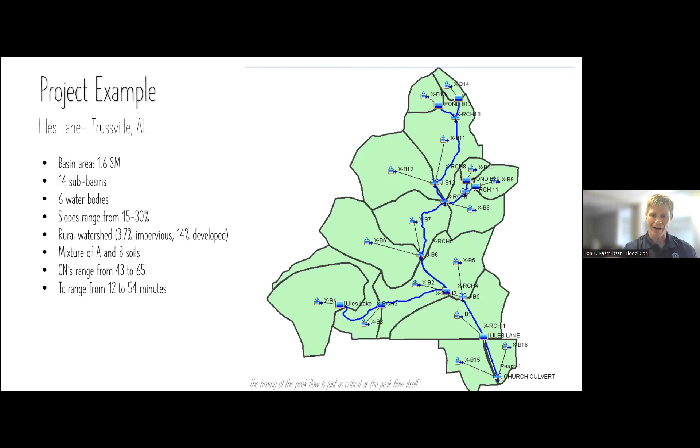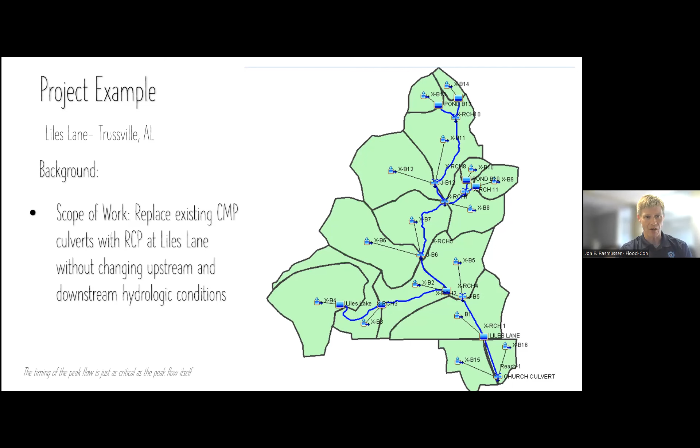And so I like to pick this watershed overall. And so we replaced the culvert pipe with RCP, I think 5 60-inch RCPs to match the hydraulics of the old CMP culvert pipes. And so what we're going to do is look at one of these sub-basins that's about 80 acres in size, and we're going to split it up into 8.08 acres. So basically, I'm trying to meet the 10% on the first one, and then watch what happens as that XB5 grows. And highlighted right there, you'll see sub-basin XB5.

And here's the LiDAR map. I just isolated 10-foot contours. And so you can tell the slope on the watershed appears to be fairly consistent. Aerial photo, you'll see a little bit of open space. It's predominantly pasture. Then you have some woods. Existing data is 81.4 acres. I took a curve number of 62.1 and then adjusted it to meet the slope conditions.

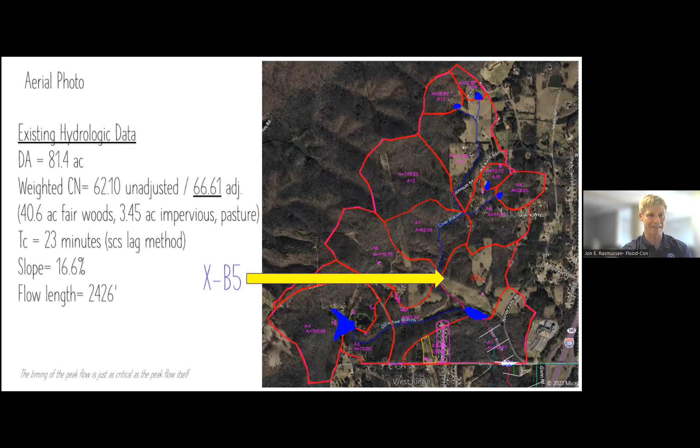And I don't know if y'all do that normally or not. I think it's something you do sometimes. Sometimes you may not want to, but in this case, I wanted to mimic what I thought was existing conditions. So I jumped it up, got up to a 66.61. And so there's a combination of woods, impervious area, and pastures. Time of concentration is 23 minutes. I use the lag time based on the slope and the flow length.

So on new commercial, what I do is implement an 8.08 acre area. The pre-developed hydrology for that 8.08 acres in this spot right here in the green is all wood. So I threw a 60 on there and of course adjusted it to the slopes. So it came out to be that 64.67. Time of concentration is 10 minutes. And so the new commercial hydrology, I just set a curve number 90, 8.08 acres and a TC of 5 minutes. So when you look at a high density commercial, that's about what you're going to expect.

And then the rest of it is offsite. So all of this is all undetained. It's all existing conditions. And this is Dillashaw Pond right here, and that's where it's all draining to. And so the offsite is the large basin 81.4 minus the 8.08. So that's where we're at. The curve number jumps just a little bit because we're taking away some woods and we've got a very small amount of imperviousness here, but we're basically jumping up the curve number and the time of concentration in very small increments as we start cutting that offsite basin down and making our developed part of the basin larger.

So the pond data. So what I did is I put a pond in for the new commercial in HMS and routed it for the 1 through 100. The volume of the pond was 55,000 cubic feet to route all the storms pre-post. Had a reach in there with all this information I plugged in and ran the model. And what I'm looking at is there's XA, there's the offsite right here, and basically I'm bringing it all to a common point where it goes into the pond.

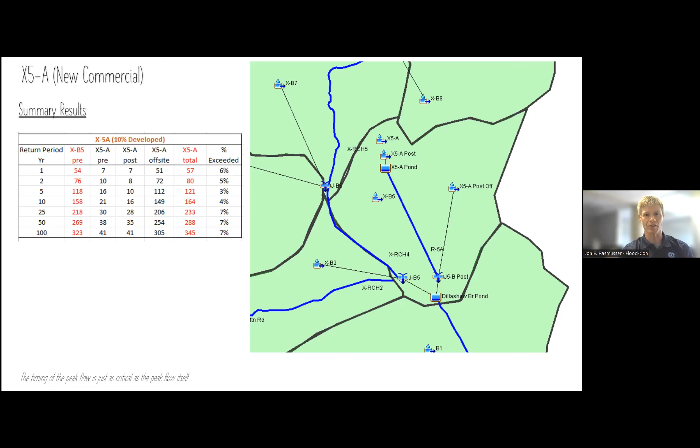So the summary results. Now I'm going to start running through these slides because I got 1 through 100 year events. I want to show you what happens as we progressively increase the watershed with new development. And so here's the first shot. This is 8.0 acres developed of an 81 acre subbasin. And what you'll see is I've got the year returns 1 through 100.

The pre right here is basically the overall basin pre, the 81 acres. And then the X5A pre represents the 8.08 acres that we're disturbing for the new development, right? Okay, so that's the pre-developed flow rates that we would be matching at the property line. And then we have the post, which is what's coming out of the conventional system to match pre-post. And I did a pretty good job. Thank you. Anyway, so now we have offsite, and offsite is going from 51 to 305.

And then the total right here, look at this, just take for instance the 100-year, it actually increased 7% compared to the pre. So it's not like we're blowing the world out, right? It's about 20 CFS, 22 CFS, but that's with 10% developed of the overall basin. Okay, so we've changed the hydrology of the overall basin, but we've just met the pre-post at the property line.

So in that respect, we're trying to do one thing, but are we really checking for downstream conditions change? And notice, my pre-developed outlet right here is 41 CFS. All right, and then my post, I matched it at 41. Okay, but 41, and we have 8.08 acres. So multiply that by 10, that's 410 CFS. That's way more than 323, right?

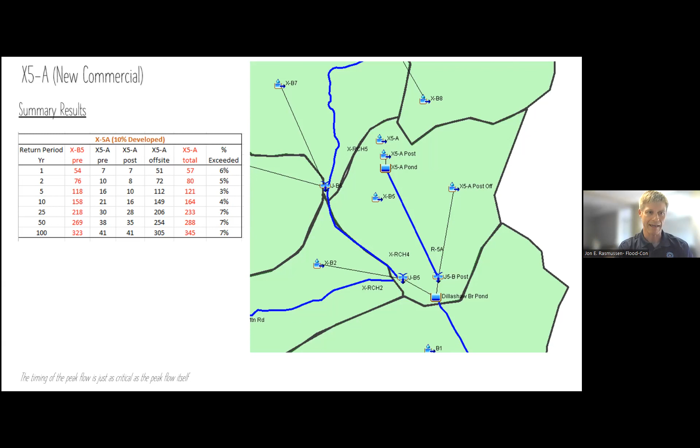So when we do our pre-developed pre-post, and I know we're not talking about homogeneous watersheds a lot when we're in a developed basin, but we need to think about, are our pre-developed flows linear with respect to the overall larger subbasin? And you may find that it isn't. And so then we go to a new installment of 8.08 acres, and I'm putting it over here on the other corner of the subbasin.

And what's happening here, all this information is going to be predominantly the same. What I am doing here is decreasing my offsite and changing my curve numbers and time of concentrations. And there's the HMS model. Same thing with the conventional system, got the reach. And so now here's my summary results by adding collectively the two 16 acres together. Now my peak flows, here they are at the total. This is total at the outlet. We've increased 100-year by 9%.

So we're adding on a little bit more post-developed flows as we increase the imperviousness of the area. So we add another one in here. Here's the third one that we add in. And there again, pretty much the same hydrologic data that I've used. Offsite gets a little bit smaller, curve numbers get a little bit higher, time of concentrations get a little lower, which means more flow. And same, this is a repeat, but the reach is different. Every reach that I've done, I've actually calculated it on LiDAR topo and got all this information. So every reach is common to the subbasin that I'm developing.

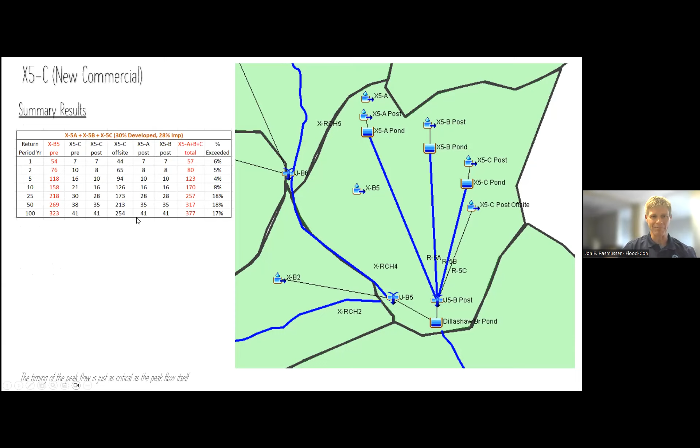So here we go. Now we're going up to 17% exceedance of the pre by adding 28% imperviousness. Okay. But we're still matching pre-post at the property line. And as we move forward and we add another one, so this one's in the middle there, basically using the same pre-developed hydrology, which is kind of conservative because that's open space, but I'm using the woods. So I'm using conservative estimates on my pre-developed hydrology to get my pre-developed flows. My hydrology data stays the same for the post, and then my offsite drops a little bit more. And so does my time of concentration, and my weighted curve number goes up.

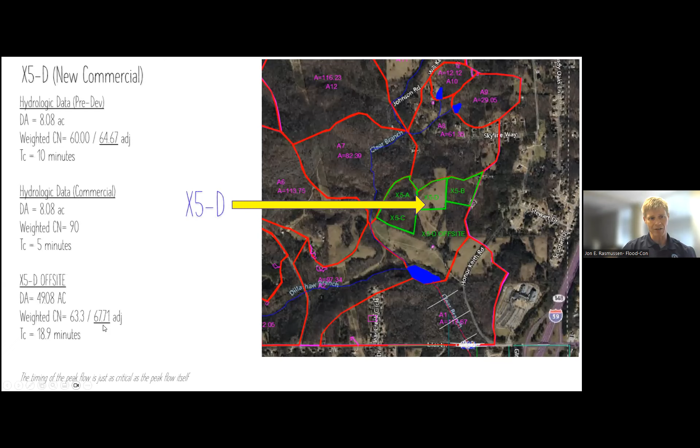So when I do that, now I have 4 of them collectively in the basin. Got the reach for it, and my flows now have jumped to almost 20%. So we're going from a 100-year of 323 to 384. And notice what's kind of interesting. I really don't know why, but somewhere around the 5 and the 10 year is not really that bad. The 1 and 2 year, it kind of starts jumping back up. And the 25, 50, and 100, obviously they get larger. But as that new development continues to build through this overall subbasin that was at one time rural, we got flows that are increasing, up to 50 CFS right now.

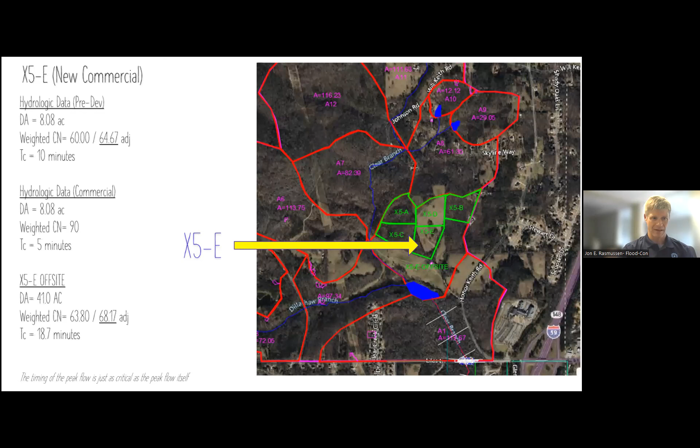So now we add another one. And so then I add the reach for it. And so now I'm up over 20%. What's that, almost 70 CFS more. So does it make sense that we're adding new development, we're matching pre-post at the property line, but way downstream at an outlet point, we could be increasing our flows?

And that's really what I've hit at this point in time, is showing that even though this basin is, I go back to, yes, it's homogeneous, and yes, it's undeveloped, timing plays a very important key to a lot of our pre-developed and post-developed flows, and how those flows are transcended down to a common outlet further downstream. And it's all a part of your timing as well as your development.

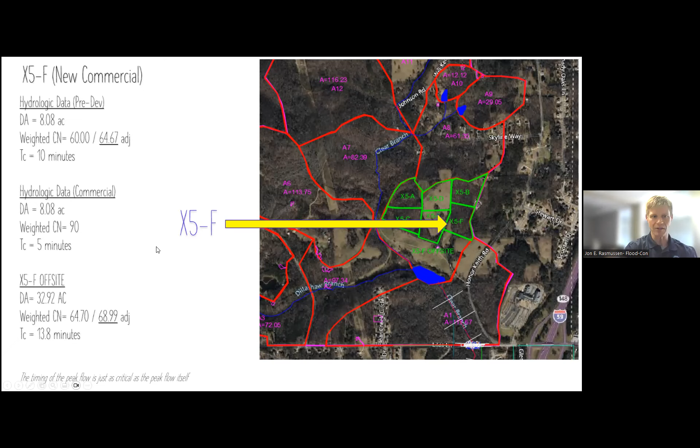So this is the last one that I did. I didn't want to bore you too much by putting the whole sub-basin in development. So this is the 6th one, added there at the right side. And curve number now for the offsite is almost 70. The original TC, I think, was 21 minutes. So now we're down to 13.8 minutes for what's remaining, which is this area right here. So when we do that, we have a reach associated with the last segment.

Now we're at 30%, which means we're jumping up almost 100 CFS difference on the 100 year, going from a 323 pre to a 420 post. So we've increased just by adding 51% imperviousness to the basin. We're at 30% increase of our pre-development flows, even after adding detention for the 1 through 100 year events.

So then I went a step further and wanted to see what's going on right here at Dillashaw Branch, which is that existing pond right here. And these flows are basically the inflow to the pond itself, from the overall larger basins plus our basin right here. So there's a timing mechanism between the two, right?

So interestingly enough, start at the 100 year, the pre is 1367 and the post actually dropped, which is pretty neat. And I think what's happening is that with the increase of imperviousness, the smaller basins are beating the peak out for the overall 1.6 square miles or whatever it is. So they're beating the flows out, so it's not getting as high.

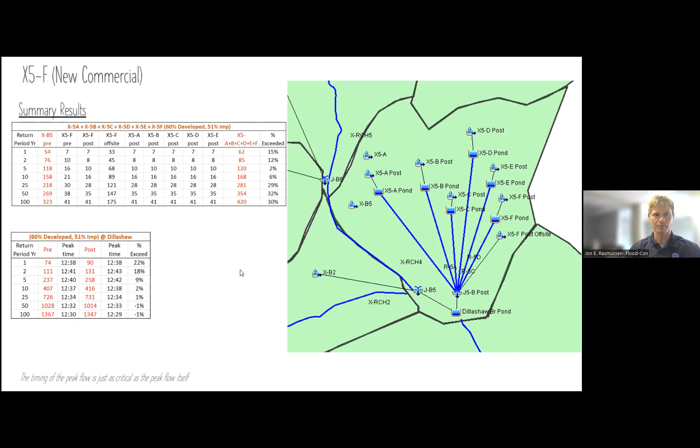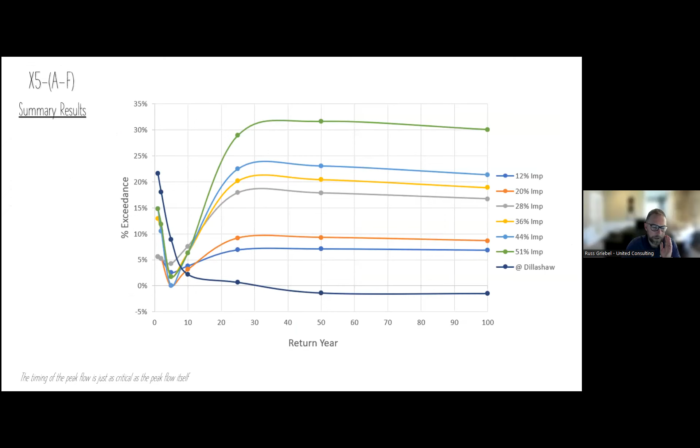Good. So this is a little graph that I did to show the similarities between, let's start right here. This is highly developed, where I used all 6 of the commercial sites together, and I did a chart graph, and I had percent exceedance in comparison to the return year. And so this is what Jeff pointed out. There's over detention in this area of the chart, which is why we're seeing a drop right here, and it jumps back up. And so the green line represents the A through F subbasins.

And so we're seeing it gets up to 30%, anywhere from 50 year on, over 30. And then we have a little bit of a decrease. And then what I did at the very end was plot Dillashaw, basically that outlet, and showed its significance of exceedance in comparison to the year event. And you can see that it has more of an exceedance in the smaller storms than it does the larger storms.

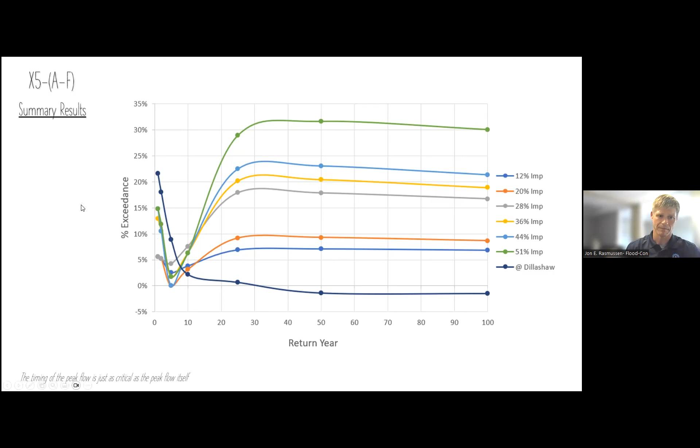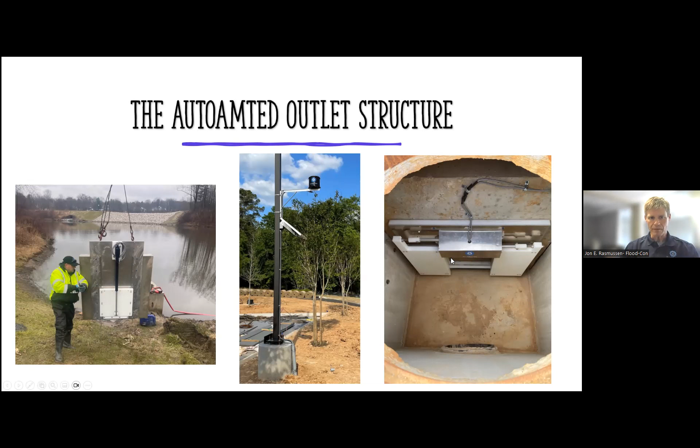So it applies that information to determine how much water can be discharged from the pond, so that we are matching the pre-developed flow rate. So our system can match the pre-developed hydrograph from start to finish. And then we also can, as an option, just do straight up attenuation for the regulatory storms. So in this case, I just compared using our AOS to the conventional structure for the 1 through 100 year events, and went back through the model.

And essentially what I'm doing is including the pre-developed peak flows that I can release right here at my 8.08 acres. Okay, that's my allowable release. But at the outlet here, I can't exceed my 323. So what I have in the model itself is two watersheds going. I have the pre-developed watershed and I have the offsite watershed going.

So basically I'm subtracting out of my pre-developed watershed my offsite to release what I'm allowed to release, but I check it against what my pre-developed flow rate is at the property line. So if I didn't use my pre-developed flows as a second condition for meeting compliance, then I could be exceeding the pre at the property line, but not exceeding the pre down at the 80 acre point of analysis. So I have two checks. I have one at the property line, and I have one downstream.

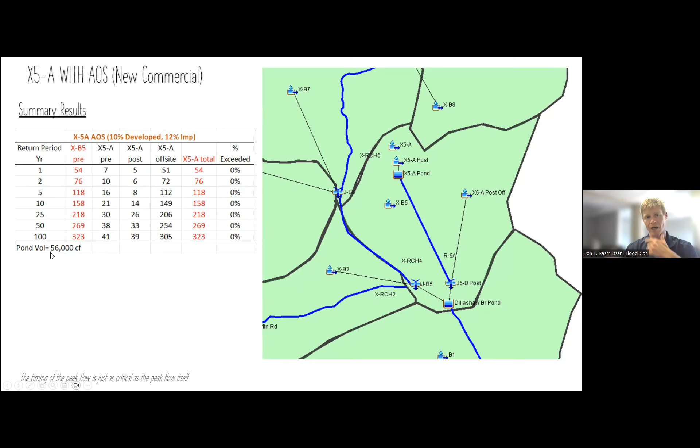And so what I'm doing essentially is summing up the ordinates of the hydrographs and coming up with what I can release at the peak. And so this is the peak release rates from the pond using an AOS. And see, I'm over detaining a little bit so that I am still matching the 323 at the outlet. And I needed 56,000 cubic feet for pond 1 to do that. The conventional system needed 55,000 cubic feet of storage to route the 1 through 100 year events at the property line. So we're pretty close, right?

And this is the hydrograph of our AOS. And we'll start out with the blue. The blue represents the release rates from the pond. And notice that it is not a smooth hydrograph like you normally see with an outlet control structure.

That's because it is choking down the gate to reduce the flow out of the pond when it's checking for the offsite bypass. So we're basically checking the year storm, checking the bypass from that year storm, and then we're saying, okay, how much can I release from the pond at an overall perspective regionally?

But then, okay, this is my number, but then checking it again against the pre-developed 8 acre site to make sure I'm not exceeding that. And so the hydrograph gets a little bouncy right there. The red right here represents the inflow into the pond from the commercial development. And the green represents the pre-developed flow for the overall 81 acre watershed.

And then the red is the total, which is the combination of the outlet from the pond plus the bypass based on one AOS, one 8.08 acre development. And so we're matching the pre, and FYI, we implement a recession algorithm to where when we're able to, we can match or closely match the recession side of the pre-developed hydrograph

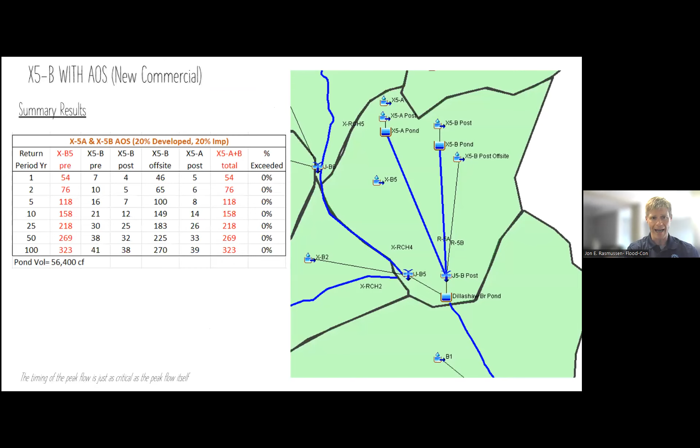so that we don't continue to release flows like you normally would expect from regular detention, which has an effect on downstream conditions by delayed release. So all that said, we're matching the 323 for the overall pre there. So then I add another pond, same thing, same storage volume pretty much. So now we have 2 AOSs in the overall 81 acres.

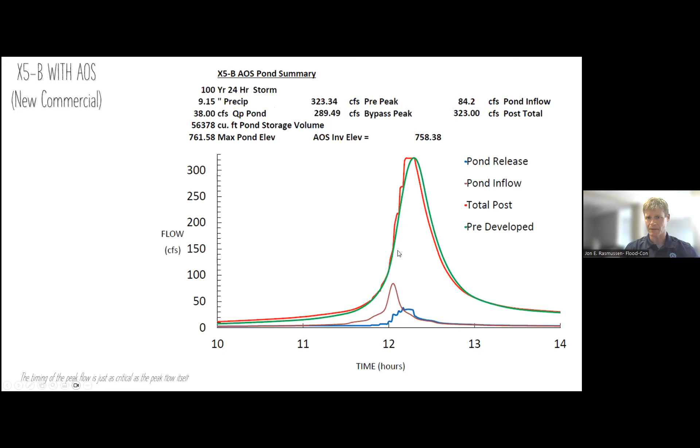And this is the output for the 100 year event. Same thing, the AOS release is at the bottom, and we're matching the pre-developed flows at the top. Then we add another one, and now this one required more storage volume. So as you develop, what we're seeing, I think the conventional system was 54,000, we're at 66,000,

which is more than what the conventional is, but the conventional still wasn't doing its job either, right? So yeah, in certain instances here we are needing to add more volume to control the overall pre-developed peak of the larger basin.

But hey, John. Yes. Yeah, if I could, we've got several questions, but if we could answer one now, it'll help add some context as you move forward. From Brad Horrible at Kimley-Horn: is the automated control structure at the commercial site pond or at the Dillashaw pond? At each commercial site. That'll help as we move forward. I'll hold the rest for a bit. Thanks. So yes, that's a good question.

I probably didn't explain that well, but for every 8.08 acres we're adding to the overall watershed, we have one pond for each one of those developments, and collectively they release to the Dillashaw outlet. So what I did originally was go through a conventional system for each pond, and now I'm replacing that conventional with an AOS at each development point.

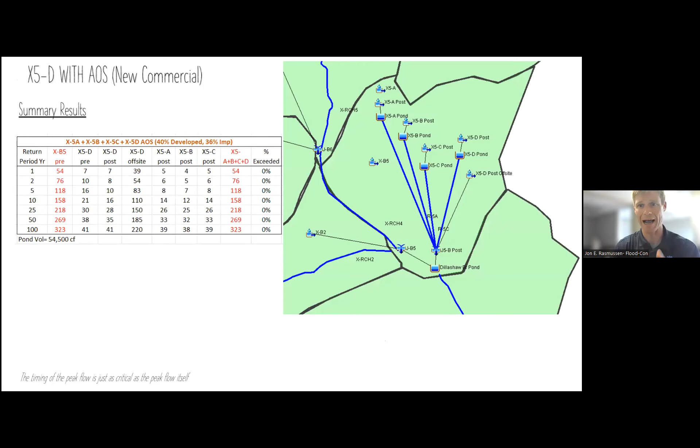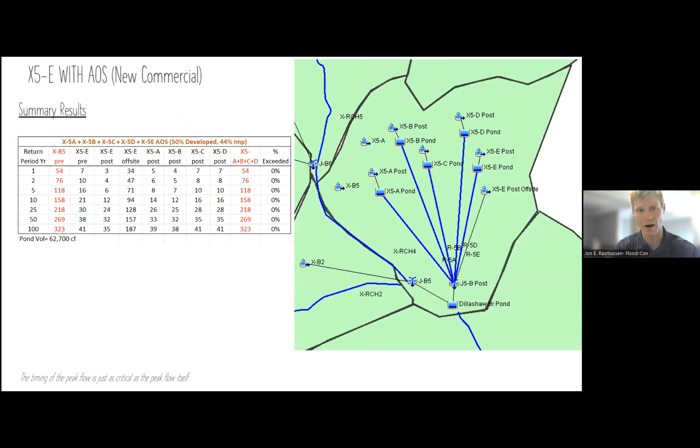And so here we are, long story short, by adding the AOS to the rest of the ponds, A through F, I'm showing basically the results. So here's the 5th pond. We're still doing the same thing, a little bit more storage volume required. Printout of the 100-year hydrograph. And then

that reversed. But so what I did was I ran the year events down at Dillashaw Pond with the AOS, and that bottom graph right there basically shows what the overall release rates are at Dillashaw Pond using the AOS. And yeah, I've already shown the conventional one.

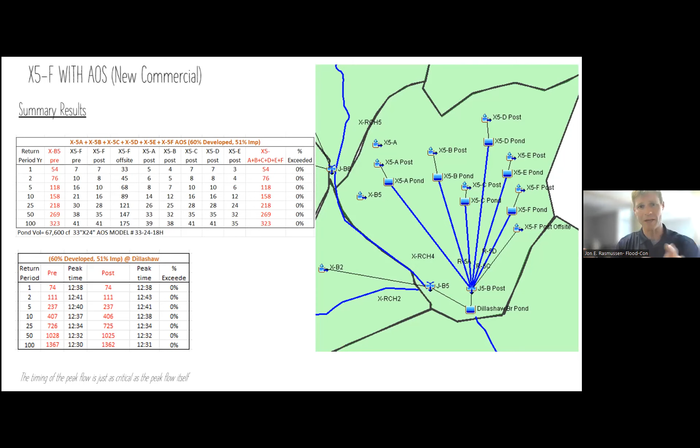But the 6th pond, I basically show 67,600 cubic feet of storage required. The AOS would be a 33-inch by 24-inch rectangular weir, if you will. And that's what would be going in each one of those 6 ponds to control the flows of the watershed. Final hydrograph. Oh, and notice something here real quick.

Down on this hydrograph, you'll see right here where I'm circling with my mouse, the AOS basically is closing down to almost nothing, so that we are not contributing or increasing the overall downstream peak. So with a conventional structure, we couldn't do that, right? Because there's water in the pond and it's going to release what it has to release based on that

head. So you have one option really, and that is to make a larger pond so that you can chop off the peak flows from the regular outlet control structure enough to not influence the overall downstream basin peak. I wish I had more time to talk about it, but I can't. But you know, the finals here,

takeaways is that every project that we work on, and I've worked on several of them, we're recreating again the overall basin watershed, if we have to check for the 10% or we're going on downstream. So if you're in a regulatory, they say, well, you need to check 10%. Well, your neighbor may have just built a Publix, and he did his 10%.

Now you've got to, and you're in an out parcel, and you've got to do your 10%. So are they even going to match? That's a big question. The other thing is that some engineers may not even realize that there's new development going in permits that are going to be applied to that same watershed. So your calculations are not going to include that development, right?